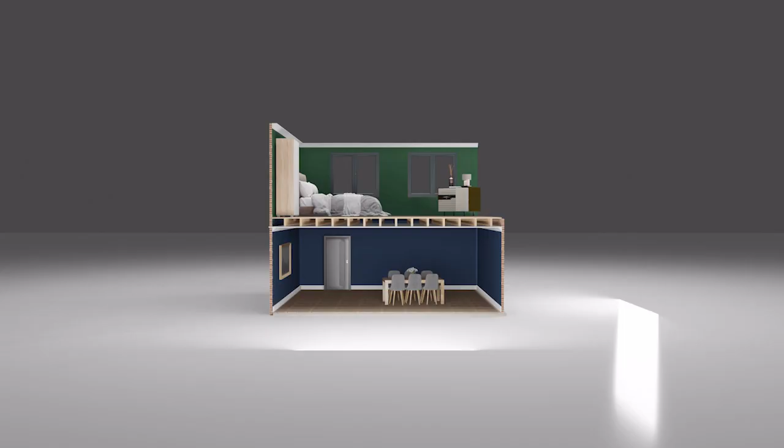Just as with any renovation or home improvement job, there is a little bit of prep to complete first. If you're doing this whole job as a DIY project, then you might want to have an extra pair of hands on site with you and look at hiring a plasterboard lift because it's the easiest and safest way to install our soundproofing boards. Just as we have already said, your current ceiling surface needs to be removed, as well as the coving. If you have a light fixing, a pendant light is preferred for soundproofing jobs because it will only make one small hole in your ceiling.

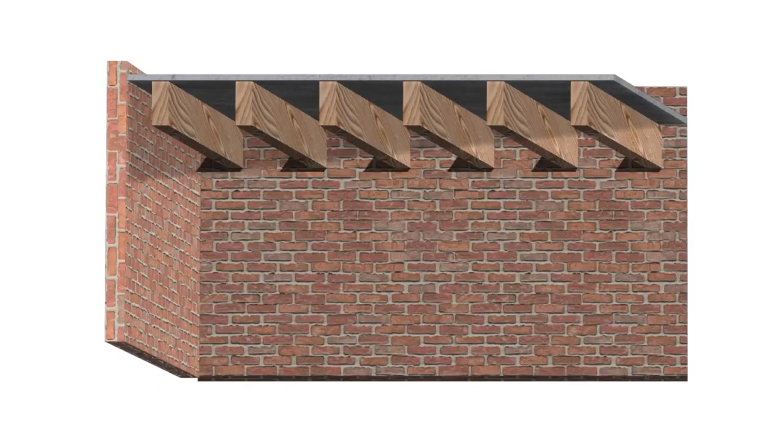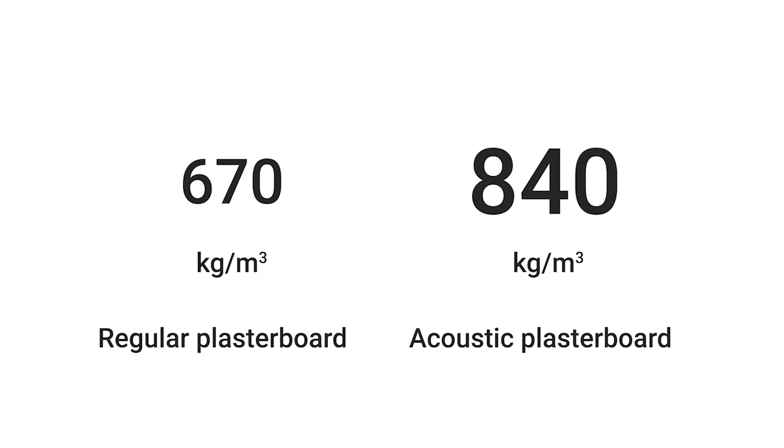If you have downlights, consider having these changed for a single pendant fixing because spotlights will create many holes in your new ceiling. Before you screw the boards into place, make a mark on the walls so you know where the position of the joists are. And this will make it much easier to screw the later layers of soundproofing panels into the joists once they've been hidden. The first layer is acoustic plasterboard. This is heavier than regular plasterboard because the increased mass makes it better for blocking sound.

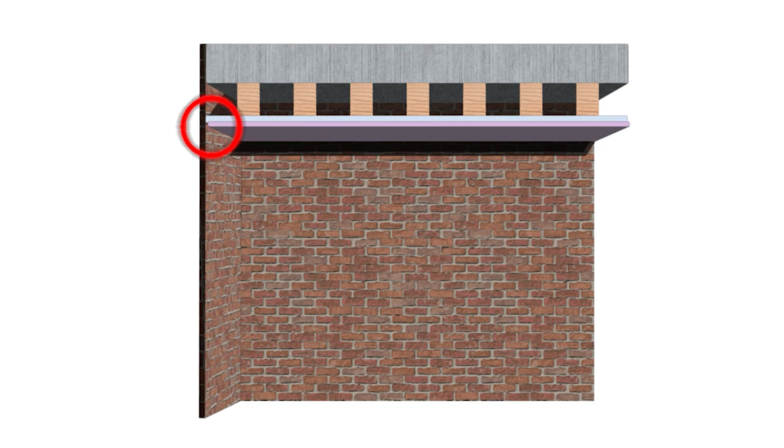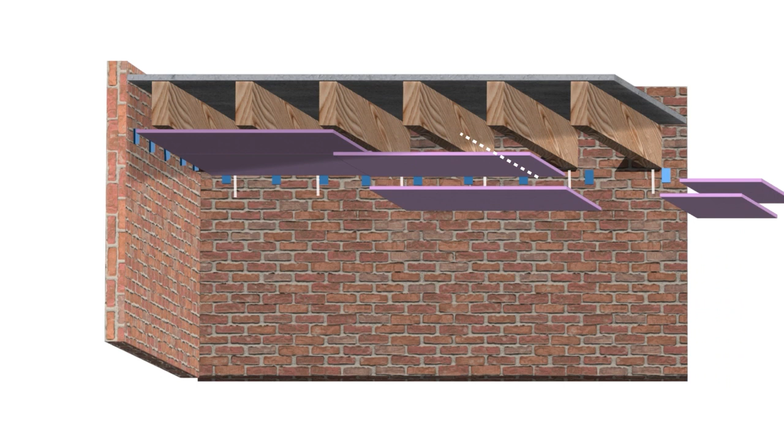Be sure that the boards don't make contact with the walls around the perimeter of the ceiling. This will create a sound transmission pathway. To make it easier for you, use some packers to keep the panels away from the walls while they're being fitted. Measure your ceiling and calculate how many panels you think you'll need. If you find that the last part will be a small sliver of plasterboard, then you'll want to cut the penultimate piece smaller. This will allow you to fit two slightly smaller panels instead of one tiny piece that will be hard to secure and create a weak area.

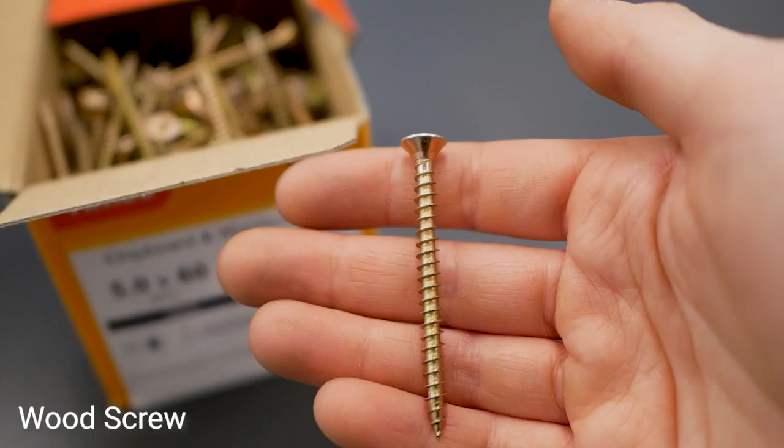Screw this into place using a suitable wood screw and fill the perimeter gap with acoustic sealant. As you go, remember to pull through your cables for lighting by making a small hole. Around the wire, you can seal the hole with acoustic sealant. If you have downlights, then you'll need much bigger holes, of course, but you can also use acoustic covers. These are not as good as simply making smaller holes for a pendant light, however they do offer a little more protection against noise travelling through the light fittings.

Before the first layer is completed, we need to seal up the gaps. Soundproofing is just like making something airtight, so small cracks and gaps do make a difference. Run sealant around the perimeter, into the gap that we left there and over the joins between your boards. You can now mark your new chalk lines using the pencil guides that you marked on the walls at the beginning. Now, the second layer is not a rigid board, but a heavy viscoelastic membrane. This membrane gives more mass and also reduces the rigidity of your system so that it can better reflect vibrations. Using materials with different levels of high mass is beneficial to soundproofing because you'll actually get diminishing returns from repeating the same material too many times.

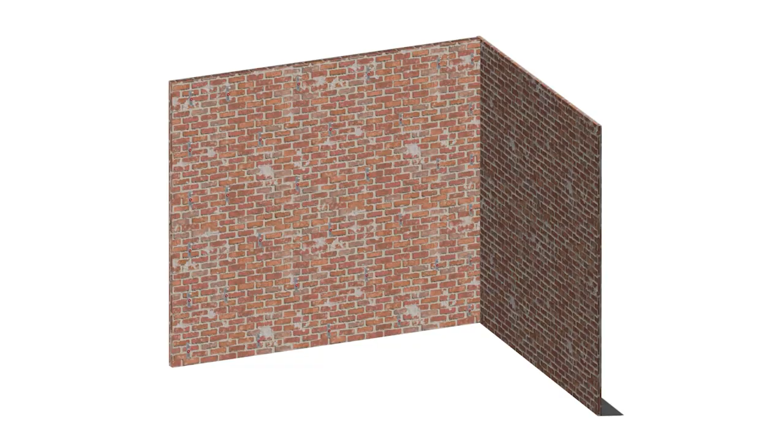The very best method for getting the viscoelastic membrane onto your ceiling is to adhere it to the last layer of plasterboard before it's screwed onto the ceiling. Bond the viscoelastic membrane to the back of the boards and be sure to push air bubbles out as you go. Membranes are easily cut with a sharp blade, so trim them to the edges of your boards for a flush finish. The second layer of plasterboard should be staggered to create a stronger system. Just like a brick wall isn't built with each layer sat directly over the first, but instead with the layers offset by half a brick each time, we also need to offset our second layer. This will mean that the joins between the panels won't match up and we strengthen the whole system.

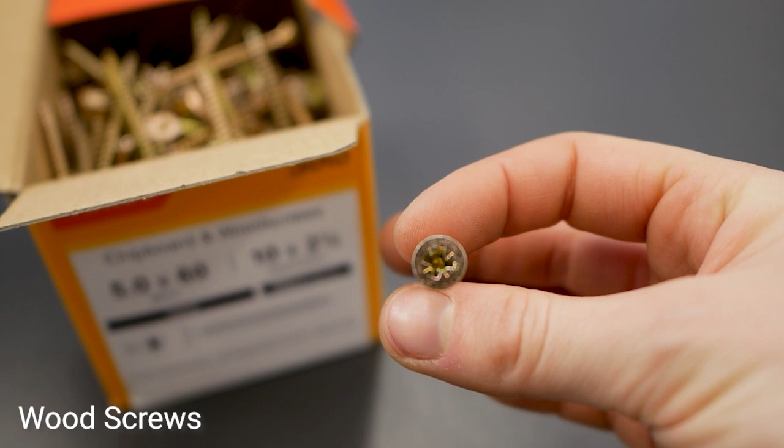Use the plasterboard lift to position the boards in place and once again create a 2 to 5 mm perimeter gap from the walls. Screw this layer in place with suitable wood screws and once again fill the perimeter gap with acoustic sealant. Over the joins between the panels, run scrim tape. This will offer good purchase for your skim plaster layer.

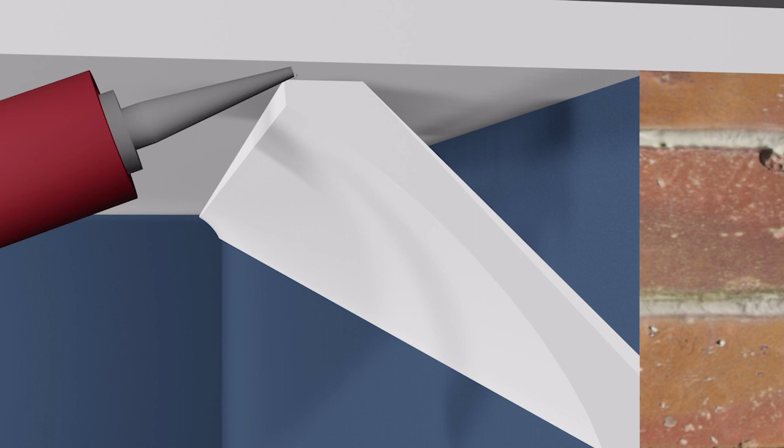If you're wanting to keep your coving, then you'll need to be very careful about how it's installed. The best scenario is just not to reinstate it, but we do understand that some people may want to retain this feature. What you need to do is either fix it to the ceiling or to the wall, but not to both. So let's say you fix it to the wall. You'll need to leave a gap of a few millimeters from the ceiling so that they don't touch, or we end up with a rigid join between your once suspended ceiling and the wall. You might have guessed it, but the gap will be filled with acoustic sealant.

Now, I've mentioned this sealant a lot throughout, and you might be wondering if a standard caulk would also work. However, it won't, so don't substitute the materials out in this way. Acoustic sealant doesn't have a rigid solid set. Instead, it has a flexible nature that works similar to our viscoelastic membrane by dissipating vibrations. So there you have it, a whole ceiling soundproofing system from start to finish.